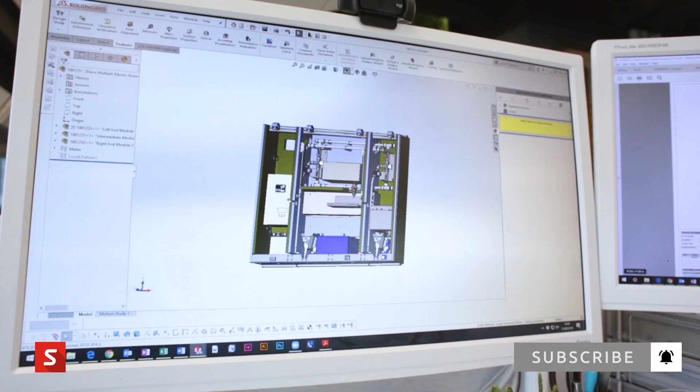We now are running at just under 100 staff, we've got 97 staff in the business. We are focusing on how we can improve productivity continuously, driving improvement in sales, and finding methods within the business that help people do more with less effort.

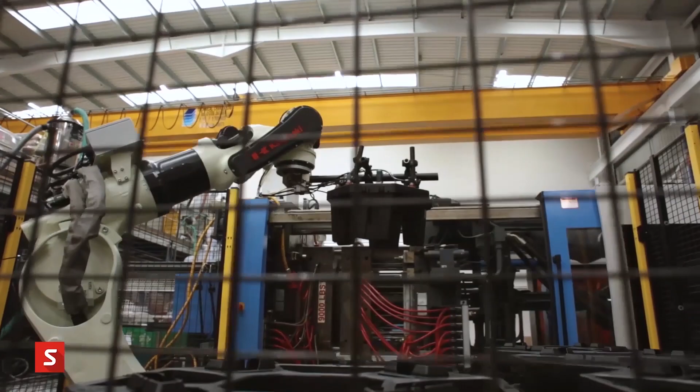When we decided to automate the product, we looked around at the market at the different tools that would enable us to do that. We were already SOLIDWORKS users and supported by Solid Solutions, and we spoke to our rep, they showed us DriveWorks. We had someone come in and do a demonstration, and we decided from there that it was the right tool for us to be able to automate our product.

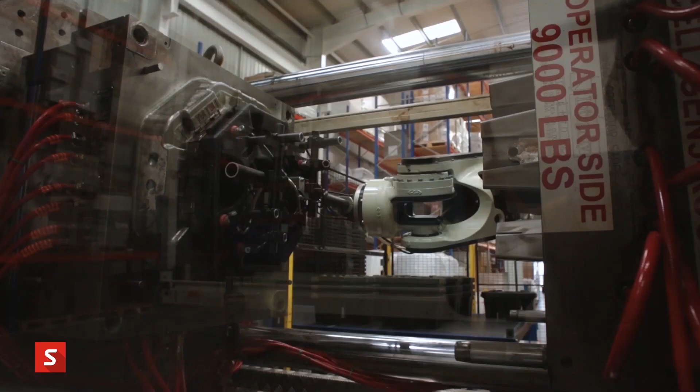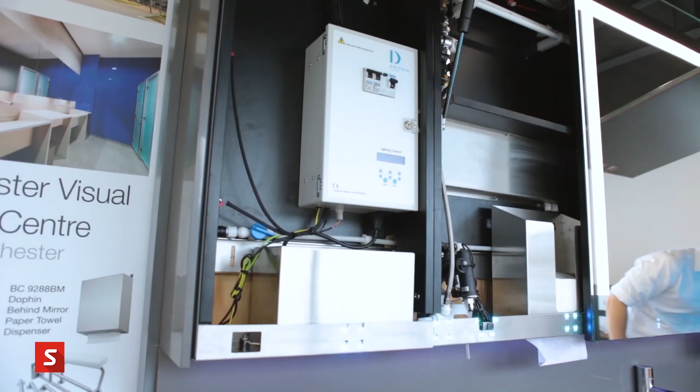Some of the team were looking at DriveWorks, and what we want to be is the easiest to specify company in the world. That is our focus in the washroom, and we do believe we have really progressed that. The team came to me with the DriveWorks proposal, and I looked at it and found ways that actually an architect now can specify our product.

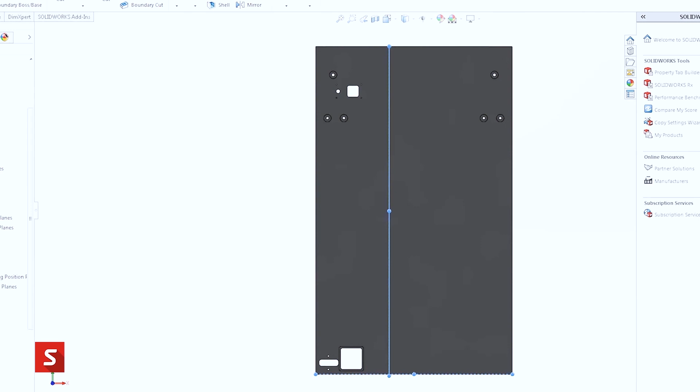They can configure the system to the way that they want it to look in the washroom. And for ourselves, we really believe that it has made it a very easy to specify system.

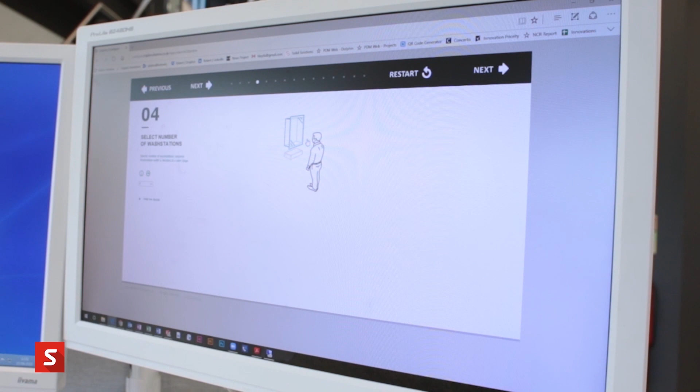So our biggest benefit from implementing DriveWorks into our company would be the user experience. That was the main reason we implemented DriveWorks, which was to give the customer the ability to configure our product and be able to see all the different configurations available from that product.

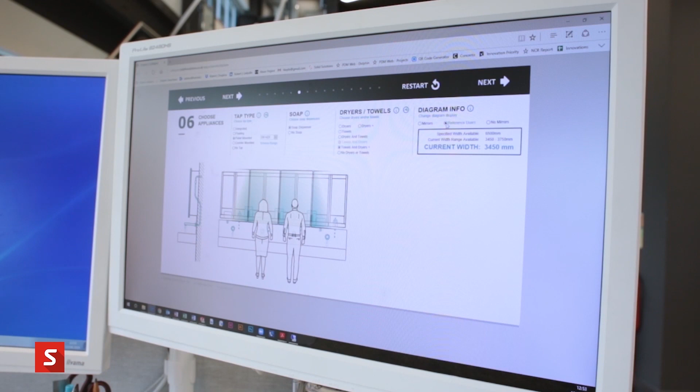The configuration tool on DriveWorks has enabled the customer a tool that they can actually play with online anywhere in the world, anytime they want. They've got a meeting and they need some drawings, they'll quickly configure a load of drawings and they can literally walk into a meeting half an hour later with those system drawings. They haven't had to even talk to Dolphin.

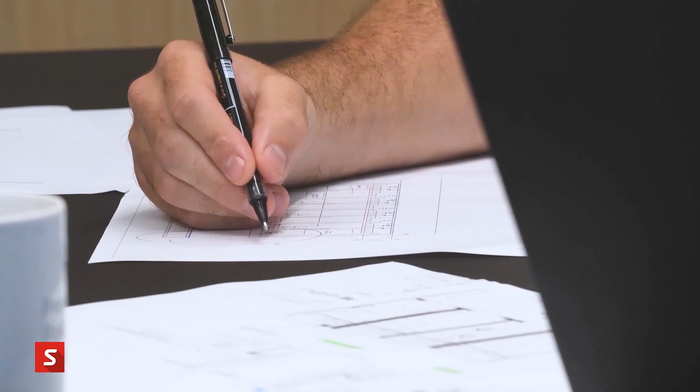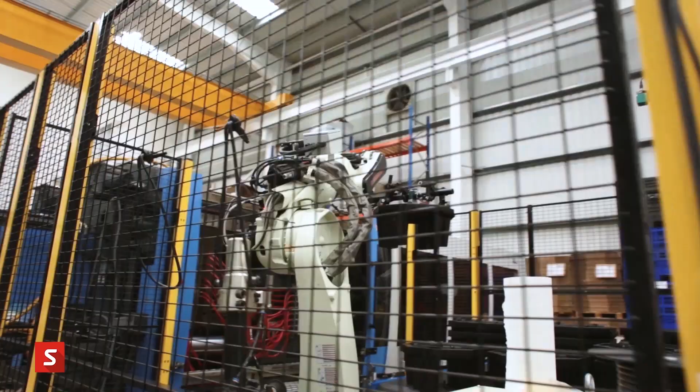Before putting in DriveWorks and being able to automate our product, the process internally for configuring one of our products could take weeks to start with the customer. Now we've got the automation, all those production files are created without any need for the design team to even see the job, which has made a huge difference on resource.

Design don't need to get involved with the job at all. So every single job now can just flow straight through operations, and we can spend a lot more time on new products and new innovations.

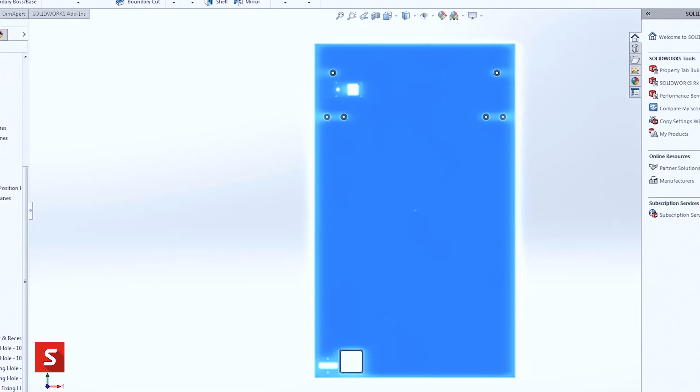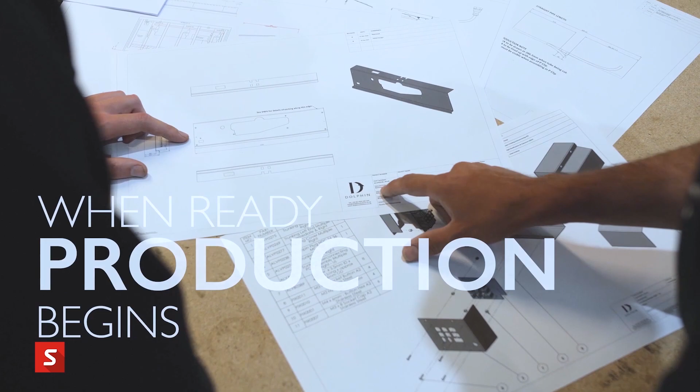We combine our configuration tool run by DriveWorks with our PDM Vault, which means that every time someone configures a product online, all the files are automatically loaded onto our Vault and stored there, and they're revision controlled. That enables our sales team on the road to gain access to all those files, and on the other end, it enables us to share our production files with our manufacturers, who can just log on and download the production files via PDM Web.

It's a process that evolves over time. Really, DriveWorks needs your undivided attention and time input to get it working.

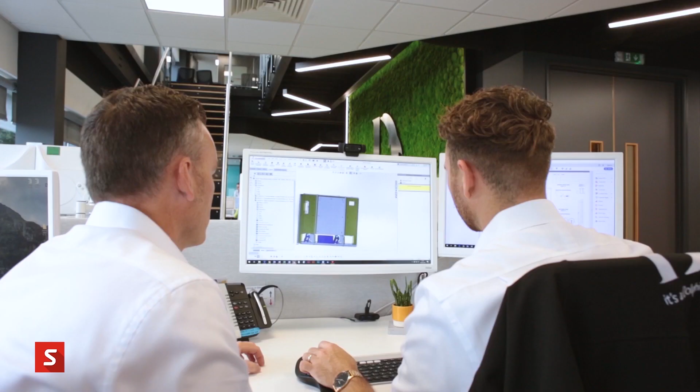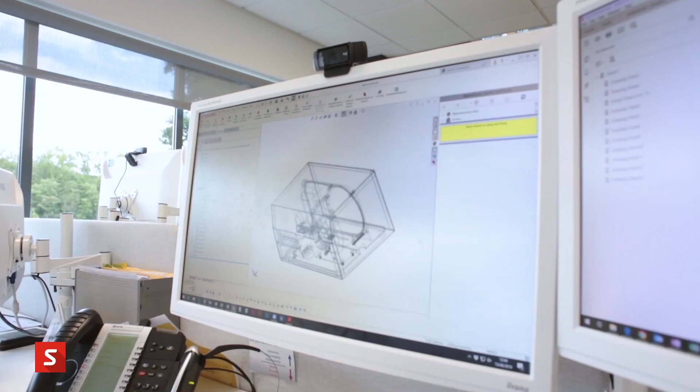Our experience with Solid Solutions has been a very positive one throughout the whole journey of installing DriveWorks, right from getting a demonstration of how DriveWorks works, to time on site helping us install the right software and actually installing DriveWorks, to then supporting us as we worked on our user forms and all of our models for DriveWorks. Having that support line to be able to call and share your screen and work through challenges as you go is important, because all the challenges happen at random times, so you need that ongoing support to solve those issues when they come up.

One of the key areas in the business is caring, quality, enthusiasm, and that is all some of our core values that we are working on the whole time. We're trying to get the whole team enthusiastic behind what we're doing, and we're wanting to be the #1 in the world in commercial washrooms.